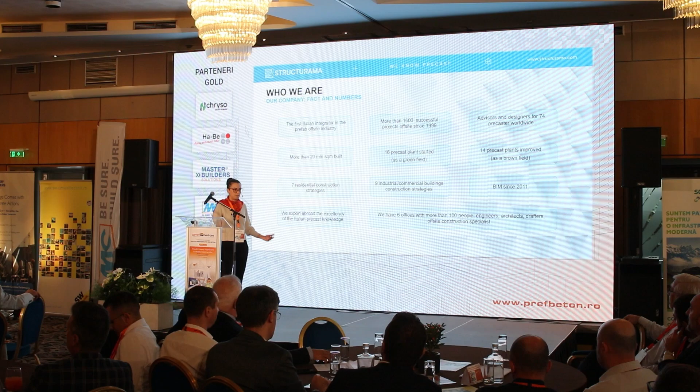Just a couple of words about who we are. We are a company that started precasting, designing precast with different factories more than 30 years ago. So in all these years we've gained quite a nice experience, you can see the numbers behind me.

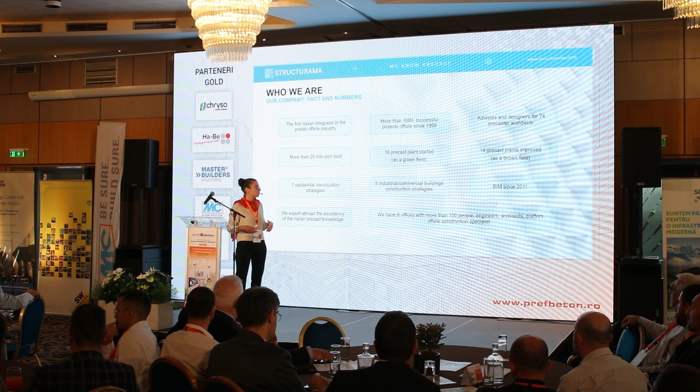We don't only do precast design, we also help start up new plants. We can say we're the first Italian integrator of the prefab offsite - we do the design but also help establish new factories. We've done around 16 greenfield projects, starting from zero, and almost the same number improving existing structures, which we call brownfield. Now we are around 100 people worldwide - engineers, architects, on-site people, technicians, and so on. So this is the plan.

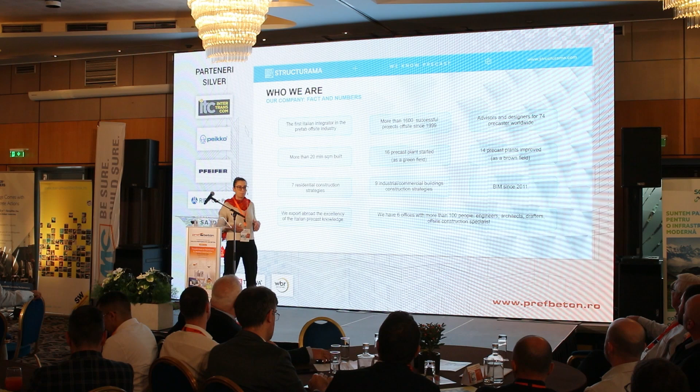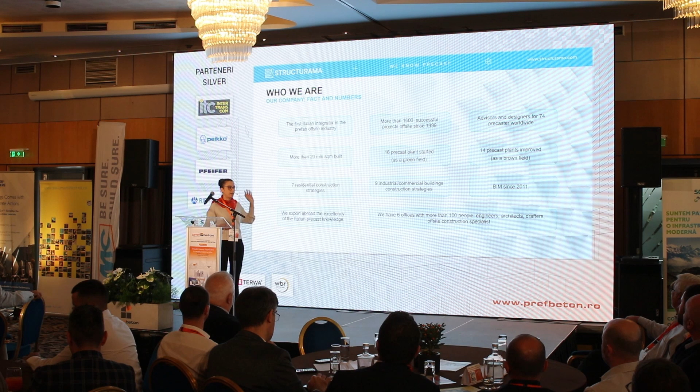In our experience, we define different types of precast construction. We have 7 strategies for residential buildings and 9 types for commercial buildings.

In this presentation, I want to start with one specific industrial building that we believe is very seismic resilient. Then I'll speak about residential strategies as well, with a main focus on refurbishing, because as the previous speaker mentioned, the ecological part of our job is important too - the future is in that direction. Refurbishing existing structures is the best way to reuse, not just recycle. We'll look at the strategy we're studying and thinking about.

Before starting, I want to present our company and show you how we think. For example, when a client wants to establish a new plant or refurbish an existing one, the first and most important thing is to think, to look around, to speak with our client, to understand what our goal is. Before starting everything, we should understand why we do this, what we do.

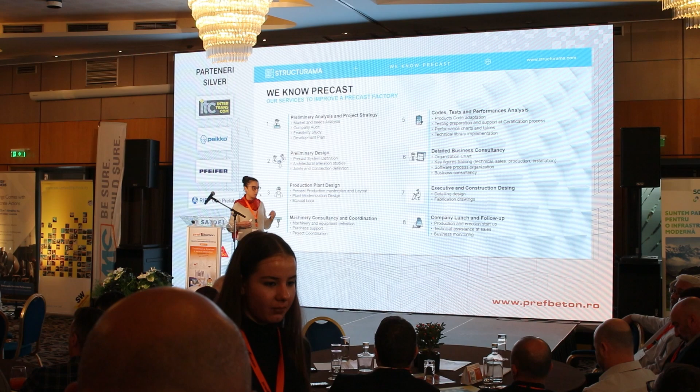Next step is people - it's important. We always talk about having fewer people, obviously for cost reasons, but it's important that the people inside our place, our family, our project, know what they should do. So training is very important. It's important to have an organization chart to understand each one's responsibility, but each person should also know their job - training for sales, for technicians in the office, for people in production, for people doing installation on site.

That is the detailing, and the job doesn't finish when we launch the new or refurbished plant. The job goes on, and the follow-up is as important as the start. This is the way of thinking that we apply in every job we do.

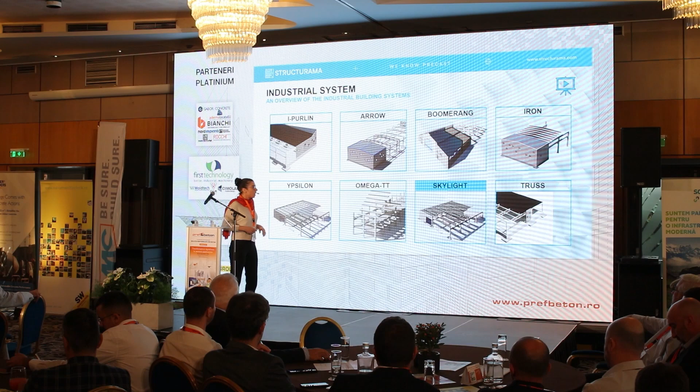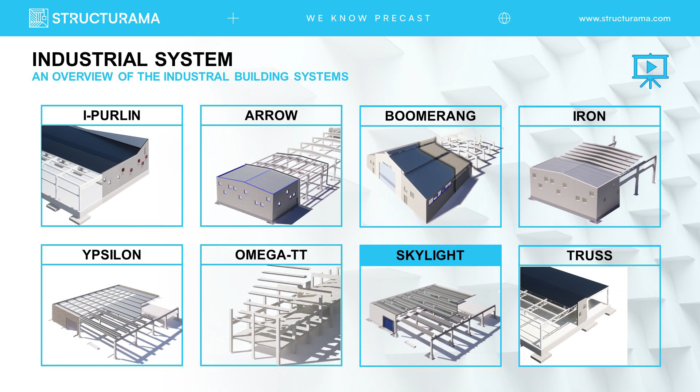Okay, let's quickly start with the precast industrial system. I think most of you know the type of structure I'm showing you. I want to concentrate on the skylight type. What is the skylight type of system? It is this kind of system.

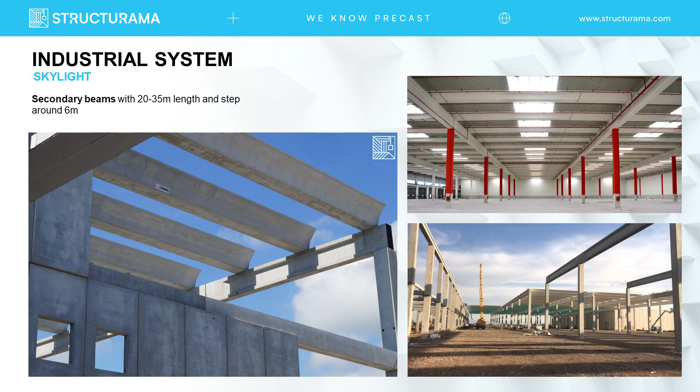It is a sort of traditional construction system, but with a really big span. The span of this beam can go from 20 meters to 35 meters. It's very interesting because aesthetically, for logistic reasons, but it also has a nice seismic behavior.

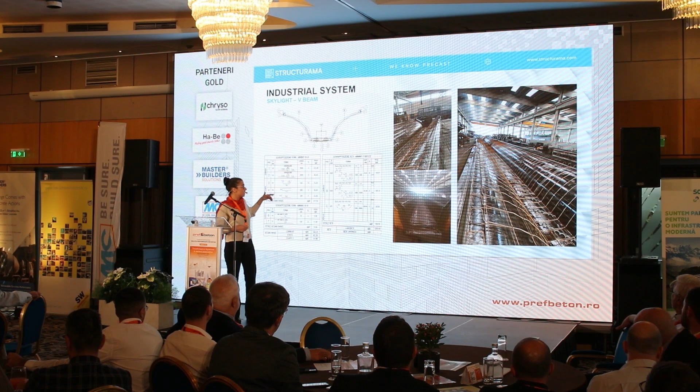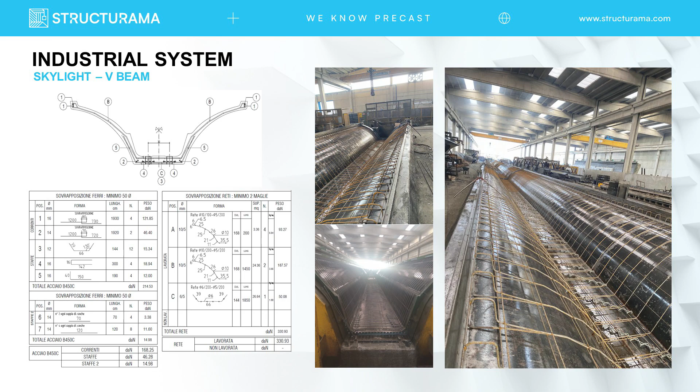This is the production plan of the executive drawing, and here are a couple of pictures of production. The production is very standardized. It's sort of quick because it's all meshed down - you put the strands, mesh up, a bit of standard rebar at the edge, and the piece is done.

So, as you say, large span is sort of lightweight, because the smallest, the most lightweight roofing is around 100 kilograms per meter. The biggest one, if you go to 35 meters, will be a bit more, but anyway.

As you can see, the main characteristic of this kind of building is a lot of light. It means it's good for logistics and warehouses because it's big, but also for production, because we have a lot of light. And a lot of light improves energy efficiency.

It is good because in the space between the two slabs, you can put solar panels, with predefined models for solar panels. In Italy, in the last years, we have had a lot of need for solar panels - it's practically a requirement. So this is a perfect match.

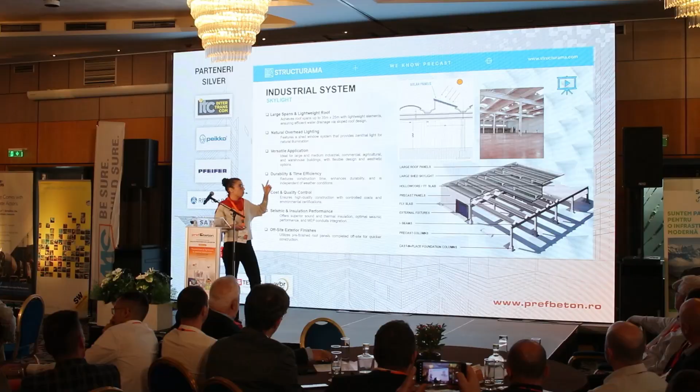And always thinking about the future, so about energy savings and insulation - you can prepare the thermal insulation inside the V-shaped piece already at the production site. You don't have to do it at 10 meters height and put insulation there. On site, after you take it out of the mold, you can add the insulation and finishing.

So when you go on site, you take your big heavy pieces, put them on the roofing, and just close it with the shed models - with solar panels, lights, or windows, whatever it is.

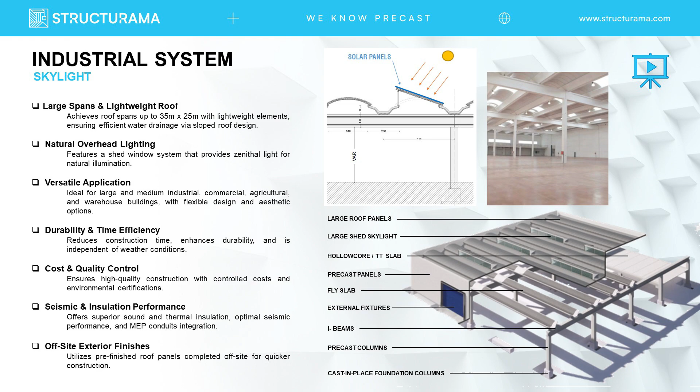The other benefit is obvious: durability, time efficiency, cost, quality control - typical of any precast situation. I chose this for my presentation because of the good seismic behavior. I'm a structural engineer, so forgive me.

This is for engineers. A typical industrial building in precast works by dissipating energy at the bottom of the column, so the structure is not different from others.

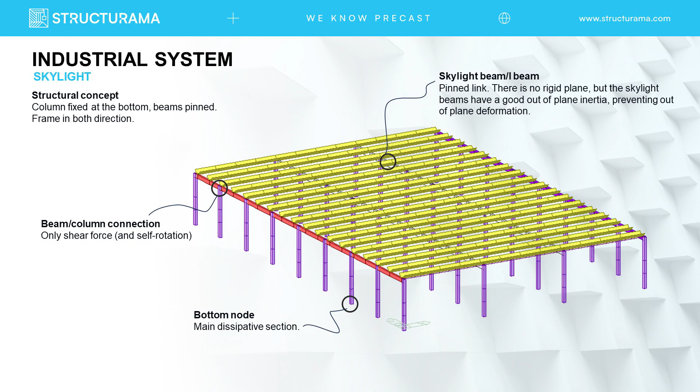What happens then? The beam-column connection is a simple connection. It must be extremely simple, because if a connection is not simple in the analysis, in the calculation, in the design, on-site it won't be done the same way - because on site we need to do simple things. So this way the connection is simple, and the skylight beam allows us to have another simple connection. We consider it independent in calculation.

But comparing it to other systems, this skylight is 2.5 meters wide. So when there is an earthquake and it takes horizontal forces, imagine it is 35 meters in length, for example, with a horizontal force in the middle - it won't have movement out of plane. It has a lot of strength. You don't need bracing in the roof, because it's very strong.

We saw this 10 years ago in Italy. We had a sort of big quake in Emilia. This zone is a highly seismic one. We have a lot of industrial buildings, and the behavior of this kind of element was very good, really good.

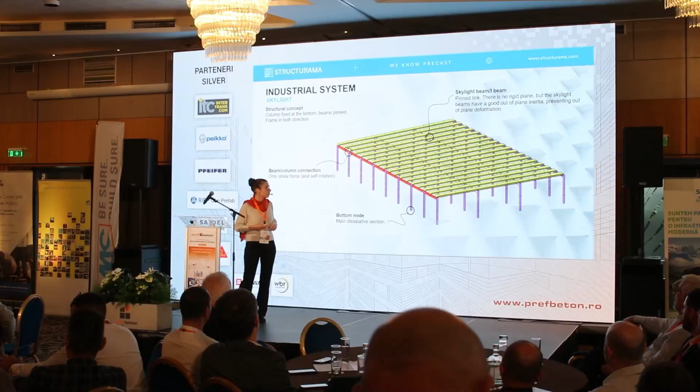When we speak about industrial systems in Italy, and especially this kind of system, there are two details we must keep in mind, always regarding this quake from 10 years ago. First is panels. In Italy, we like heavy concrete panels from the top of the building to the bottom. It's a lot of weight. Is that good or not with earthquakes?

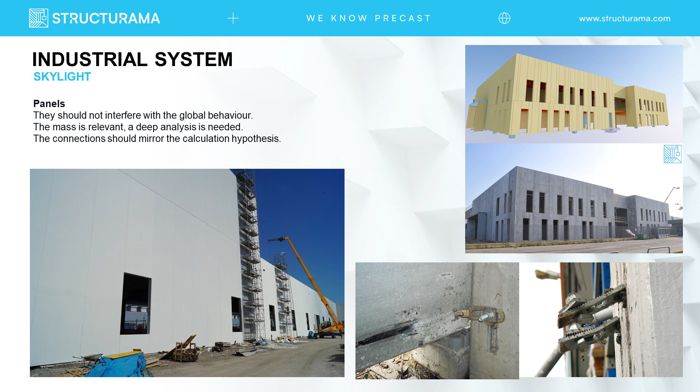The answer is, I think, shown by the first thing I will show you. You must think twice. It's good, well, it can be done - you can do it if you manage to understand how they work and how to harmonize with the behavior of the structure. These two pictures at the bottom were taken after the earthquake some years ago, showing a connection between panels and structure.

In the first, the connection stands but the panel is gone. In the second, the panel moved around 20 centimeters away from it. So which is the problem? What do we do now? We think more.

We have studied some connections that will work - you can see a study. The first, on top, shows the computer calculation software, and the second is the same building in reality. It's possible to do that. This one is a 20-meter high building, with the lower 14 meters made with thermal-insulated panels.

And it is Bologna, so the seismic zone is quite high. It's possible, but you have to take care of a lot of details. You have to think more before starting. The second detail that I want to point out for seismic buildings, and especially big buildings of that kind, is the foundation connection. You have columns that are 30 meters apart.

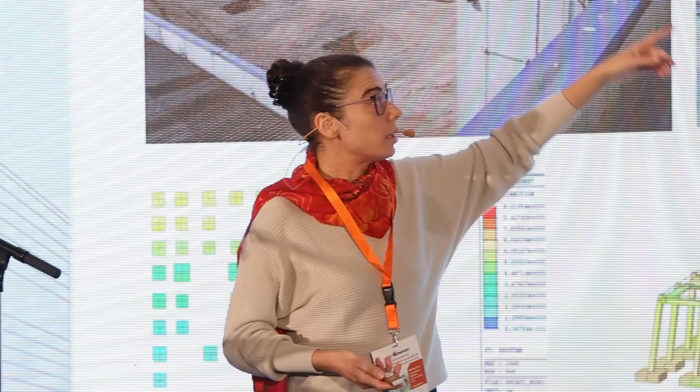So, if you look at the top part, it's already finished. In the part on this side, they finished the roof and they are closing the roofing. On the other part, we are still putting the columns in place. With all these people going around, machinery going around, cranes and so on, we could not do the cut for the connection beams of the foundation.

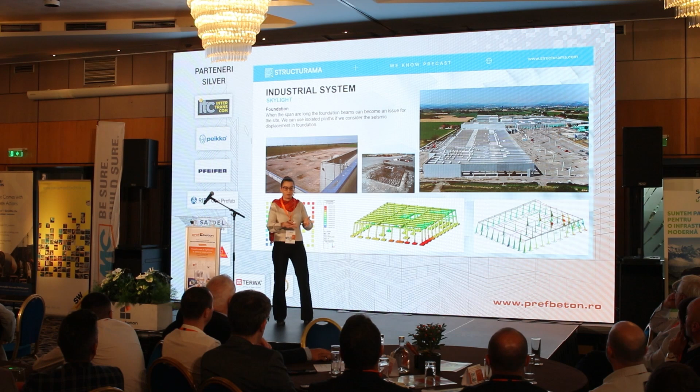What do we do in this kind of situation? We study more, we think more, we study details that can connect the whole building. For example, this is a study to understand which are the details of the whole building, not only the foundation, that can make it resist if during the earthquake, for example, there is a crack in the ground of 10 centimeters, if the columns move apart by 10 centimeters.

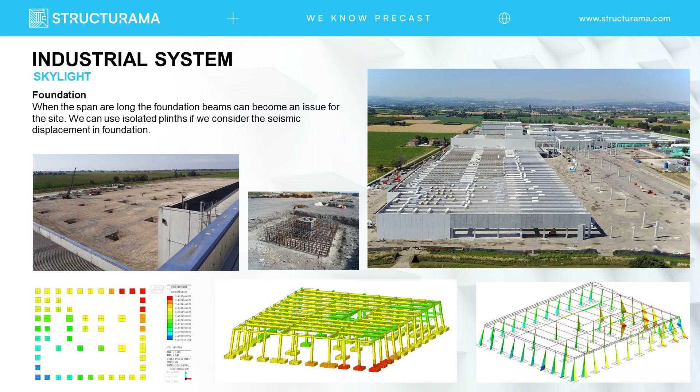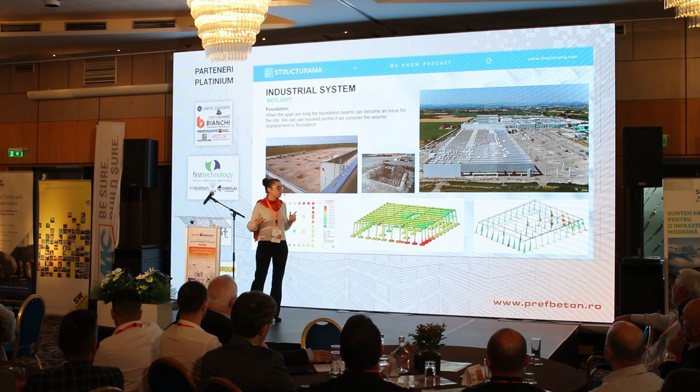So the result here was, okay, if we think more, if we think harder, we can find easy details that allow us to use elements that at first glance are not seismic. Instead, yes, we can manage to make them seismic too. Okay, and this is the first part, for the industrial system.

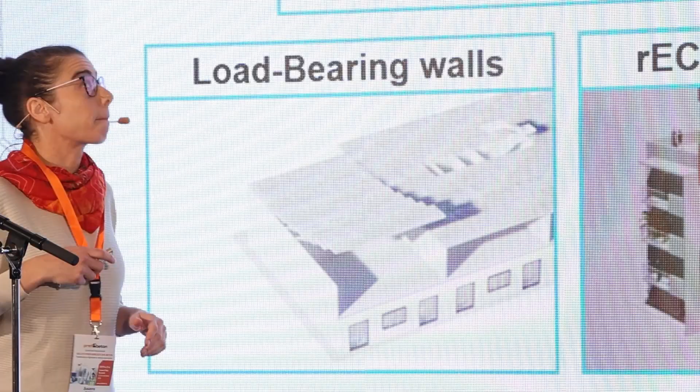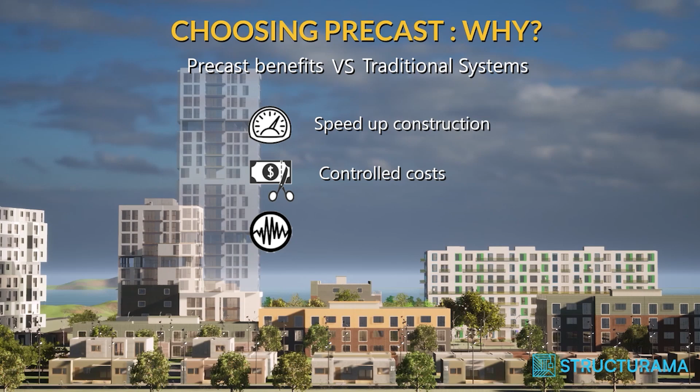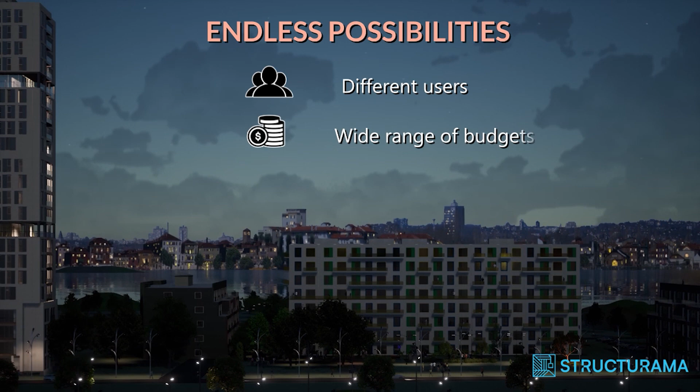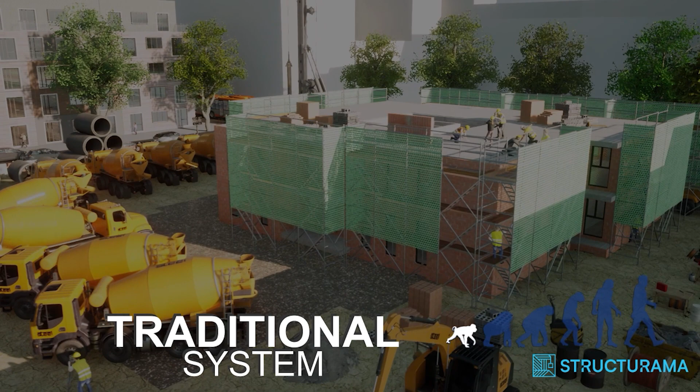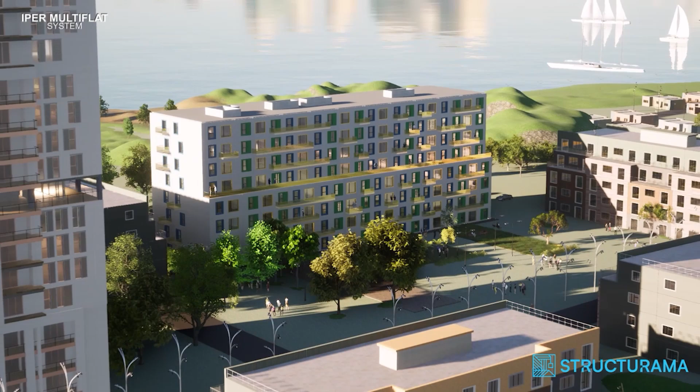The first type that we will see, the most used everywhere, is normal standard cast in place. The second step is to make it like industrial, but with a lot of levels. The problem is it's not very seismic resistant, and the thickness of the floors is very high. So the next step will be to use the walls, use the stairs as seismic resistant elements, and make it thinner.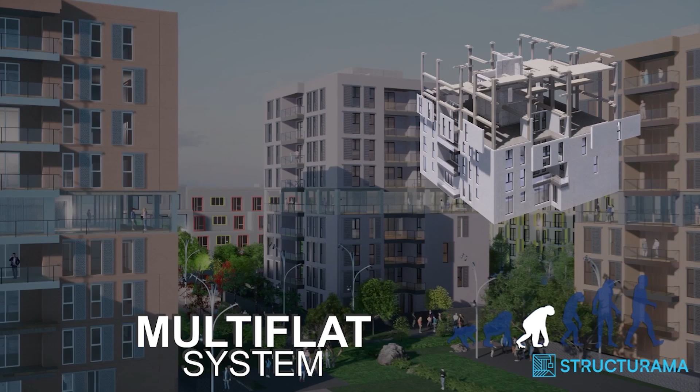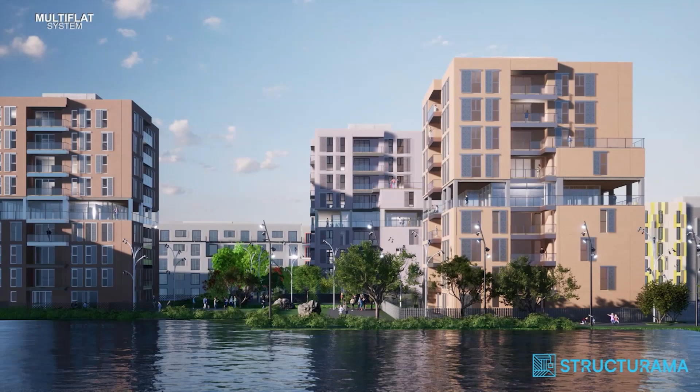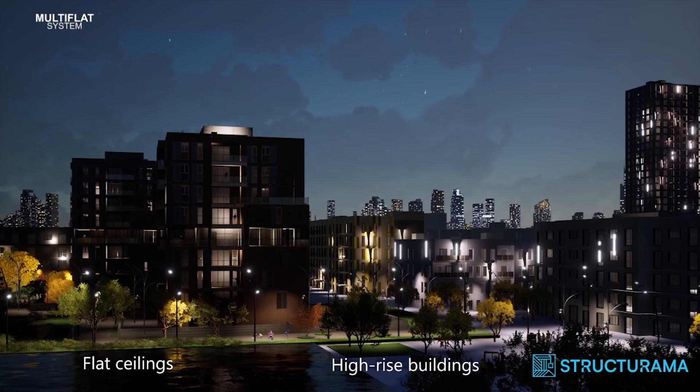This is almost the same as before, but as you can see, there is the central stairs, and it's thinner, and the details need a bit more study because you have no space. Okay. Next step. Okay. The next step will be to build walls, shear resistant walls.

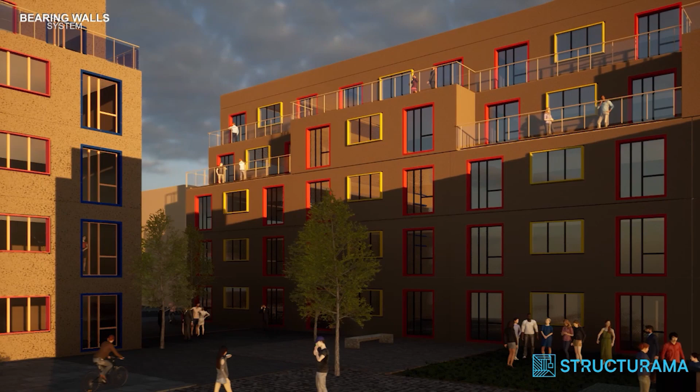We all had a presentation this morning about the advantages of this type of construction. In this wall you can put insulation, you can put everything. They have a wonderful seismic behavior and flexibility of layout because you don't have problems deciding the spaces and so on.

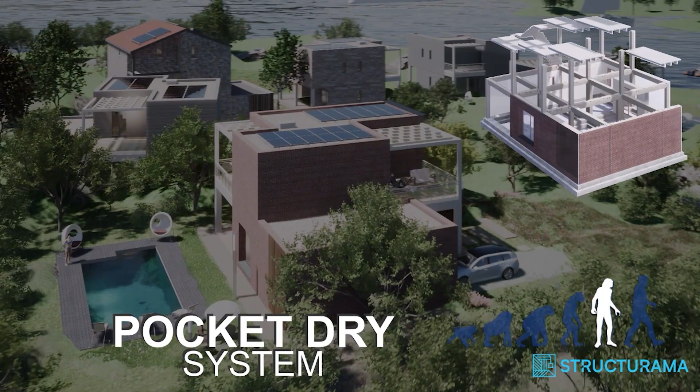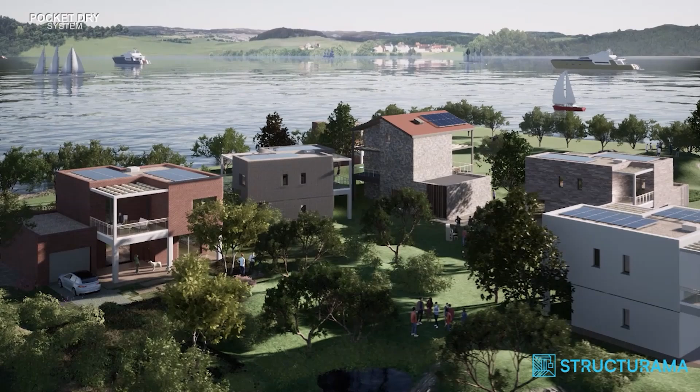This is another system. We use it, for example, for some villas in Naples near the volcano. It is almost the same as before, but it's totally dry. There is no second-step casting. It's completely, totally dry. It's seismic resistant and totally dry. This is a new step.

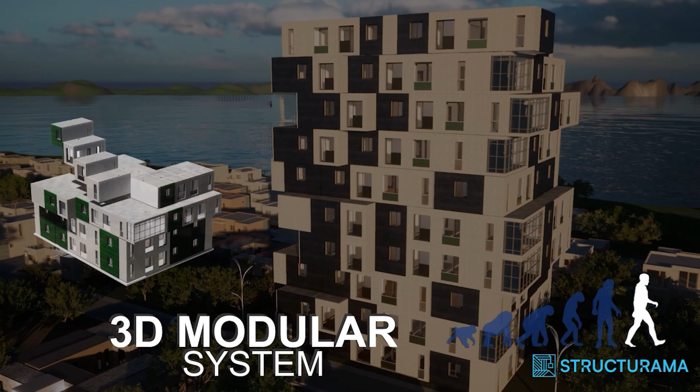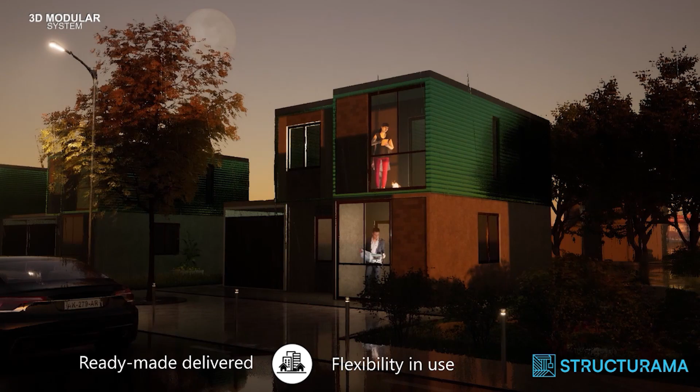As you can see on the right, we have a modular system. In the plant U-shaped elements or cubic elements are produced. We should think more to make a nice building. You can do high-rise buildings or small villas, depending on the style, on the fantasy of the architect. Anyway, this is a quick overview of our structural systems for residential.

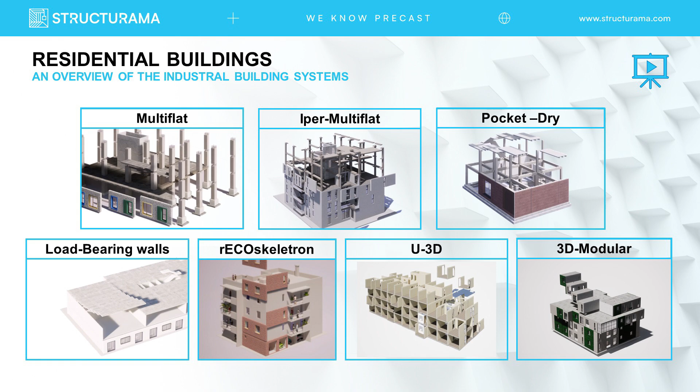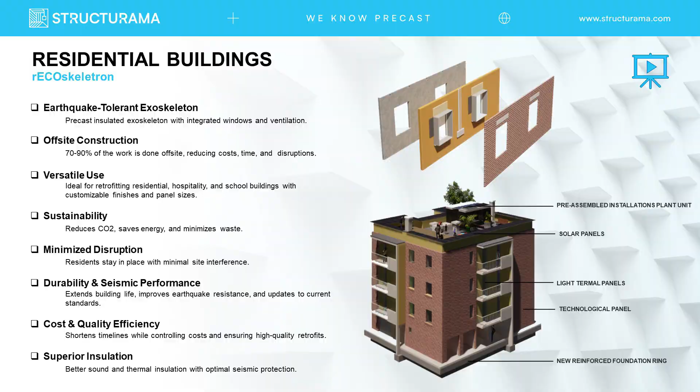So what is the best ecological thing to do? It is to keep the same building and refurbish it. Okay. And this is the rECOskeleton technology that we are studying, that we are testing. What is it? We prepare panels that consist of a structural layer, an insulation layer, predisposition for pipes, plumbing, electricity, whatever, and finishing. And in the mold, we also put, for example, windows. Everything is already done in our precast plant.

So the time, we divide it into three parts. First, study, because to reach this, we must study a lot before. We must film. Maybe we can use the video while I explain. Thank you.

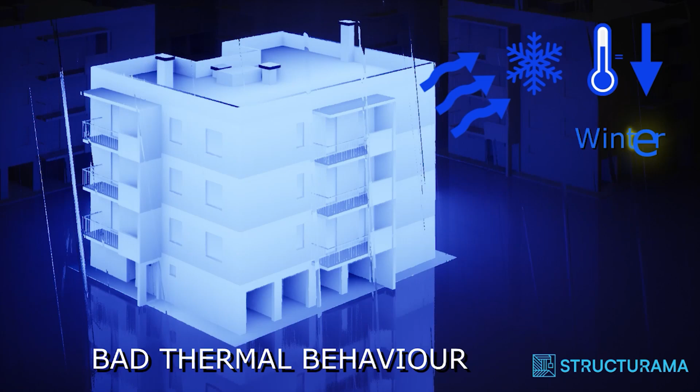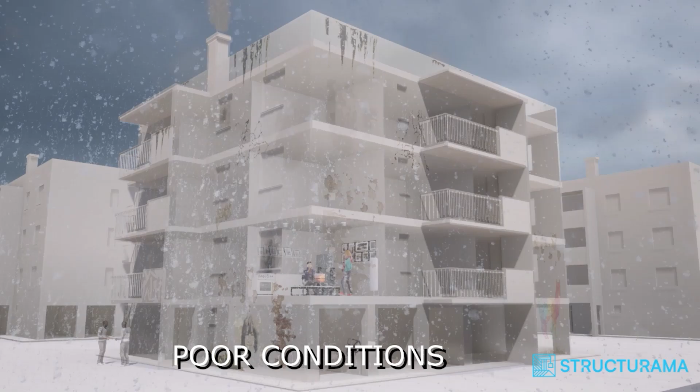We must study a lot because all the things that we said, BIM, Industry 4.0, if you don't already have a high informative system, you cannot reach it. Yeah, because as we say, the design part is one of the most important. As you see, this is a typical old residential building area with a lot of thermal dispersion, low seismic performance, and so on.

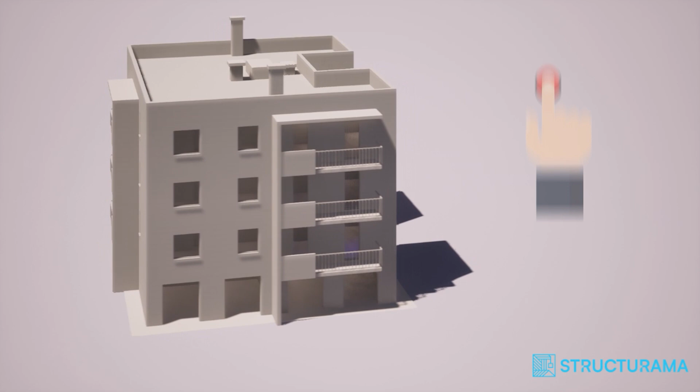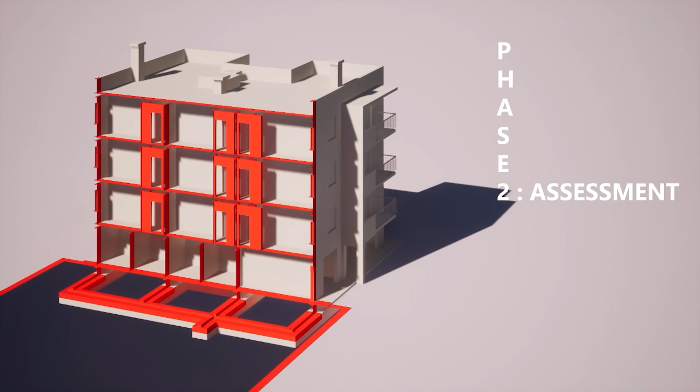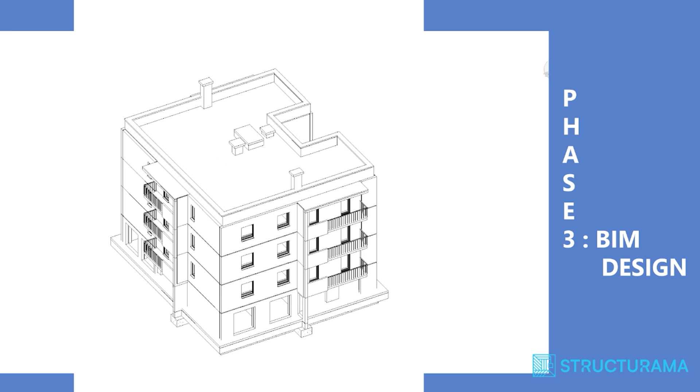What we want is to renew it, maybe also without asking people to go away for a couple of years, because if I refurbish a building like this, there are 20, 40 families inside, I cannot tell you, please go away. So, the first phase is study. Study and assessment means that we should know everything about this building. The geometry, the materials, we should test it, use BIM design.

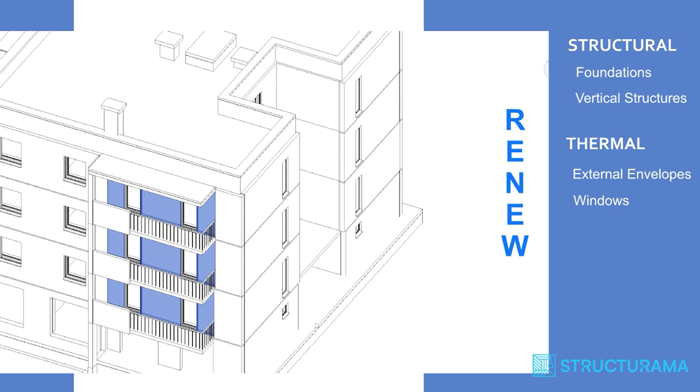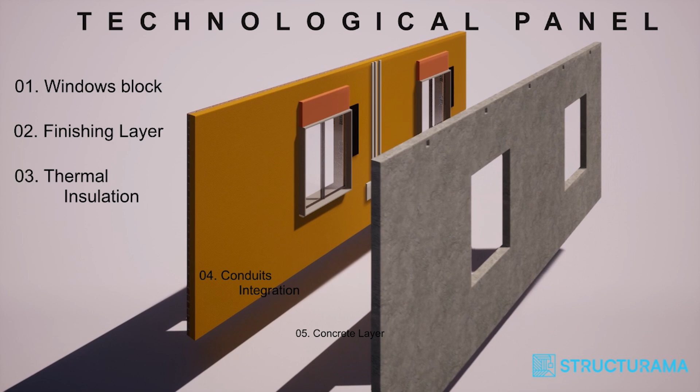Use BIM design also because we speak with the people who study the plant, installation, mechanical; everything must be decided before starting. So it's the most important part. Then we prepare this magic panel. In some situations maybe we don't need the staging part, in some situations you need it. Typically the vertical load is taken by the old structure, the horizontal load from the seismic is taken by the walls.

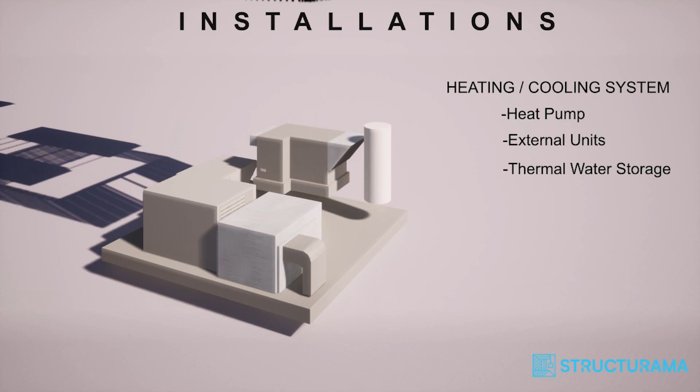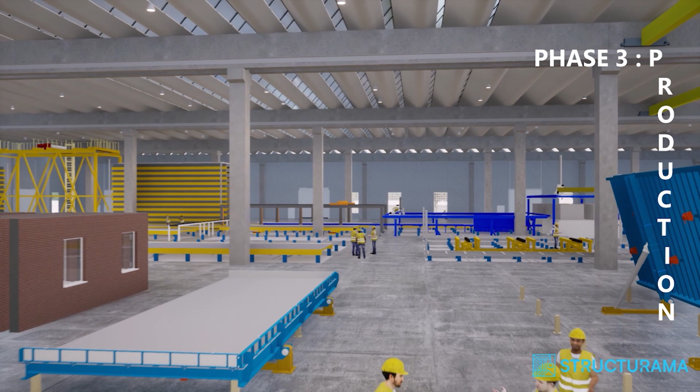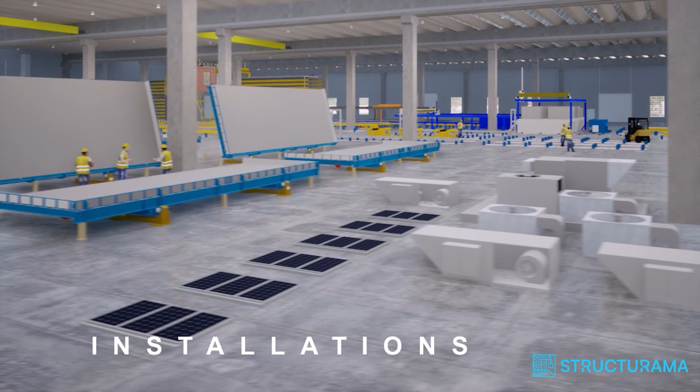We prepare in our factory also the technologies, the heating, cooling, photovoltaic, and we prepare everything in the factory. In the factory we have better control of the process. It means less time, less materials also. It's the biggest optimization that we can do.

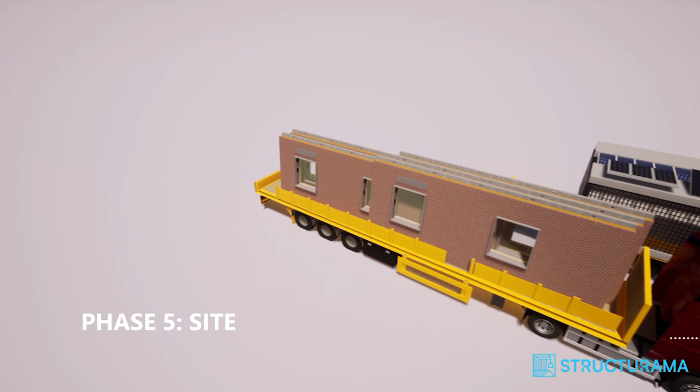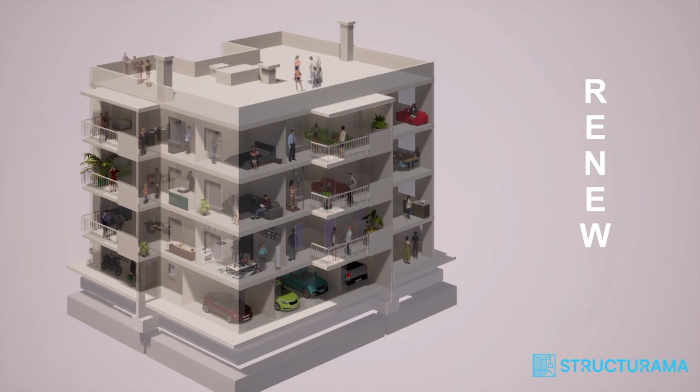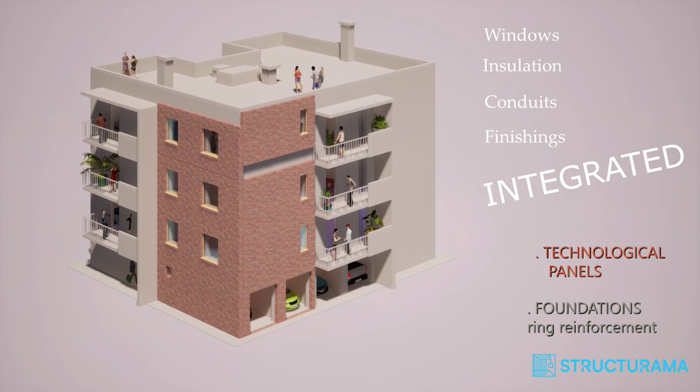We bring on-site this part already prepared. As I said, you already have the windows inside here, everything, and the walls are there anyway, we apply this on the existing wall. The connection must be made and so on. So the time that you work on the real building is very short. You can do a bit of reinforcement of the foundation, and everything is clear. Everything is integrated.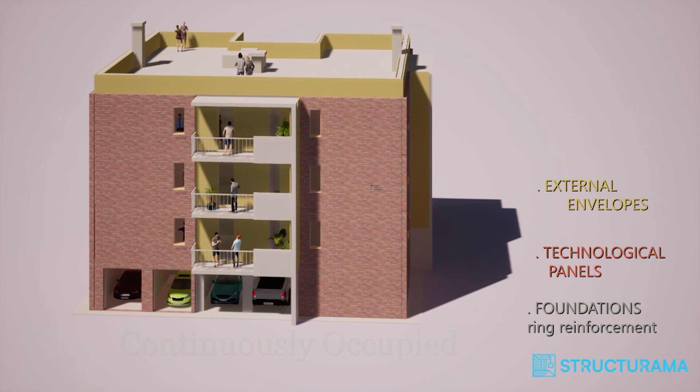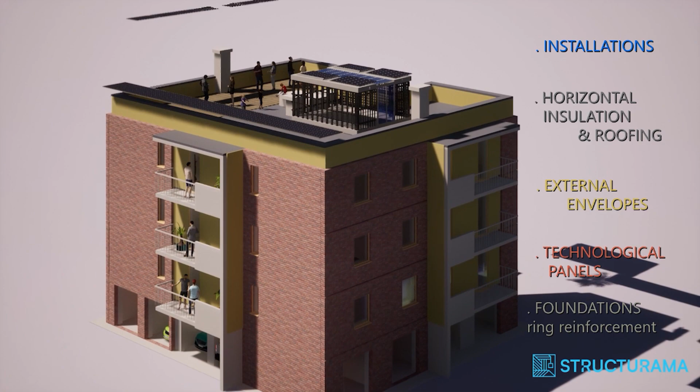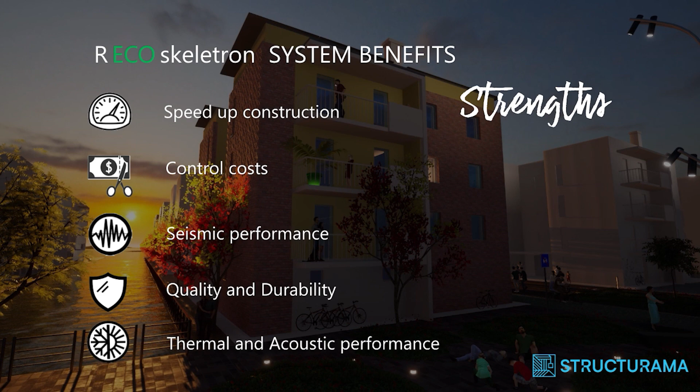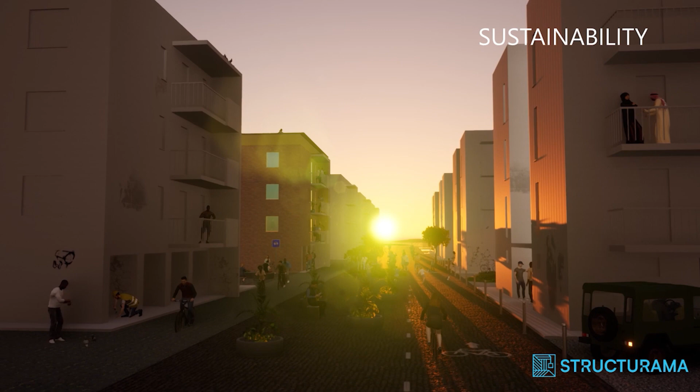There are different levels to apply this technology. You can do a full seismic and thermal refurbishment. Maybe you need something on some part. Maybe you apply it on some walls and others you can do on site. As we said, it depends on the condition, the situation, and what we want. Those are the benefits that we obviously have. And this is what we are studying right now. Okay, you can stop the video, please.

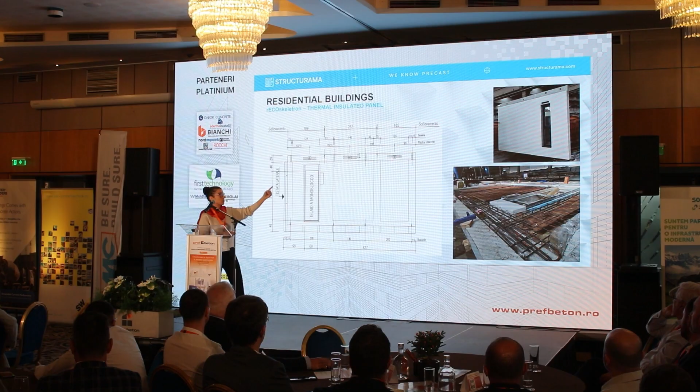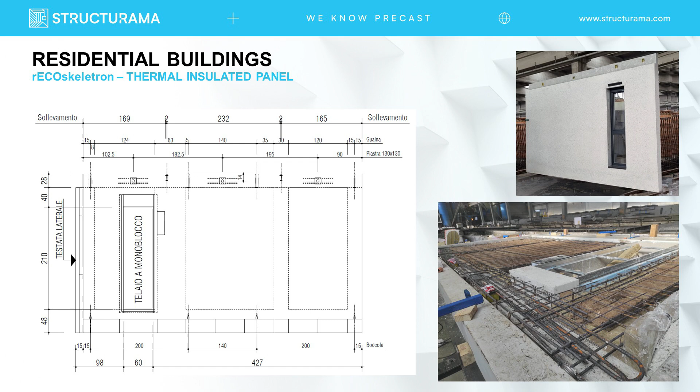This is what we stated before, with a strong accent on energy saving, and to reach this we need a new technology. Okay, just a picture of the real thing. This is the building that we are doing now. This is a panel. If you see, there is already the glass of the window inside. And this is part of the executive drawing. Okay, that's all. I hope that I didn't annoy you.

Thanks everyone. My name is Andrea Căsuță from UTCB. Thank you for your presentation. I just have one question. How do you validate your seismic resistance? You said several times that your systems are seismic resistant. How do you validate them? Do you make experiments, earthquake proofs, or what else?

Okay. Mostly we validate with existing codes. I mean, all these kinds of buildings have a code. For example, the V building, the skylight building, they are standard buildings with improved detail. When we validate it, there are a lot of earthquakes, so we can also see the result. The validation of the code is one thing, and the result is another. The previous buildings were also done according to the code.

But for example, in the Emilia quake, the acceleration in some zones was 20-30% higher than the code, and so it has been a good benchmark. Some residential buildings we did after the L'Aquila quake, also in Italy, around 5 years ago. So there are two sides of validation. One, the existing code, the Italian code, not only yours, also American code, depending on where we are going. And second, we look at the pieces.